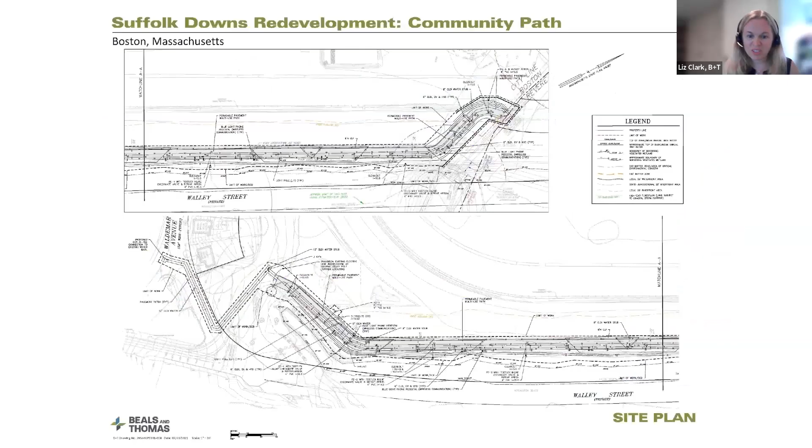Commissioner Kunian had asked about resiliency and sea level rise. I did reference our significant undertaking that we went through with our MEPA filing and the studies that had been performed. Actually, if we could flip to our slides, I'm gonna have you skip. Keep going, you're going to the back. So VHB had commissioned an extensive resiliency study on the site. This exhibit up here is showing the 4.2 foot sea level rise scenario with a 100-year rainfall event. And we have a variety of scenarios going here.

We have our no build condition and our full build condition up at the top, as well as the phased analysis. And you can see that through the mitigation measures that we're doing under our full build, we are reducing the level of flooding. The measures include adding tide gates, upgrading the regional stormwater pump station, as well as raising our roads and providing some flood storage throughout the site.

So we provided the 1.5 feet of sea level rise exhibit, which equates to the 2035 business as usual scenario, not changing anything, and the 4.2 feet of sea level rise, which equates to the 2070 business as usual sea level rise. So the worst case sea level rise scenarios. We did acknowledge that during 2070, in the event we get the 4.2 feet of sea level rise, the 100-year storm event, and then a 100-year tide, we will see flooding on the path for about 2 to 4 hours. But this is consistent with our resiliency strategy, which utilizes the open spaces for flooding.

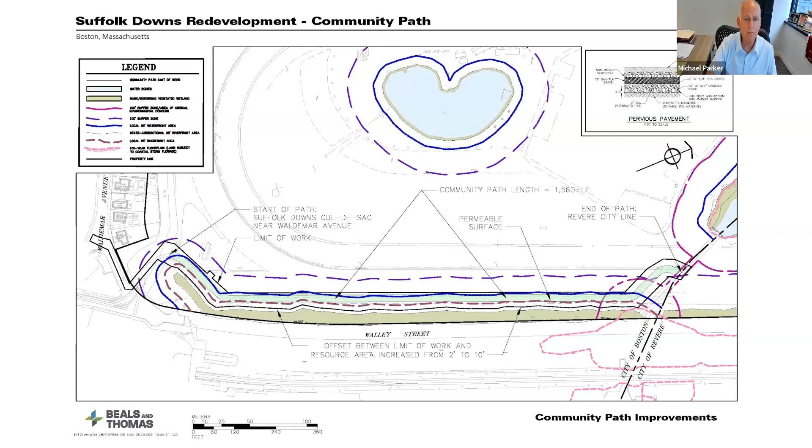Elena, did you have anything? I didn't have anything on this. Okay, thank you. Commissioner Sullivan?

Liz, I thought I had asked if you were putting in a permanent water line down this path at this time. Yes, we are. You did. Yes. Oh, and so I asked it and you answered me and I forgot. Okay. And I think then you had a question. Yeah, my question was a lot better than Nick Long's. So I'm just letting you know.

And I had referenced that we will be discussing that in a separate forum when we file our site plan review application with you. And you had further asked if the water line would be active or not. Yeah. Which is something we should also discuss and come to a resolution. And I'm open to your feedback on that. Okay, that's all I had.

Okay, perfect. Yeah, Liz, we're a very sensitive group. You should probably refrain from that. Great question, Commissioner Long. Oh, thanks for the tip. See what happens. You all had great comments. There you go. Much better. Commissioner Long. Yeah, Liz, thank you for answering my great question and my regular question.

Happy with that condition language. It looked like, yeah, initial invasive removal and then subsequent management. So that sounds wonderful. Great, thank you. Commissioner Wilson? Sorry, mute problems. All good on my front. Thank you. Commissioner Kunian? Thank you, Chair Parker.

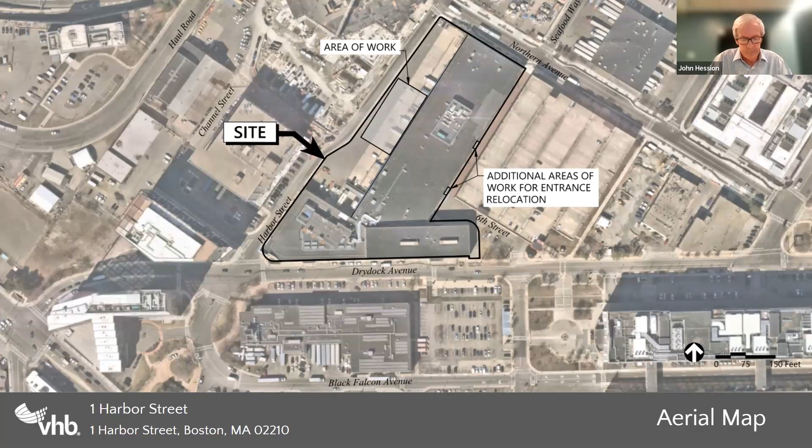And as the chair mentioned in the reading of the public notice, the entire property and the proposed area of work are both located within two resource areas. That's the reason we're here before the commission tonight. The first resource area is land subject to coastal storm flowage, as defined by the floodplain identified on the FEMA flood maps. It's a little bit obscured there, but the FEMA 100-year flood elevation at this location is elevation 10. Translating that to Boston City base, that's 16.46, and most of the other information presented tonight will be in Boston City base. Next slide, please.

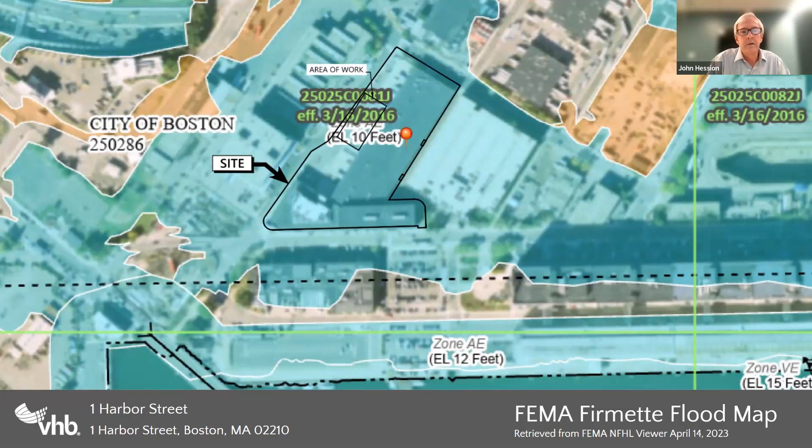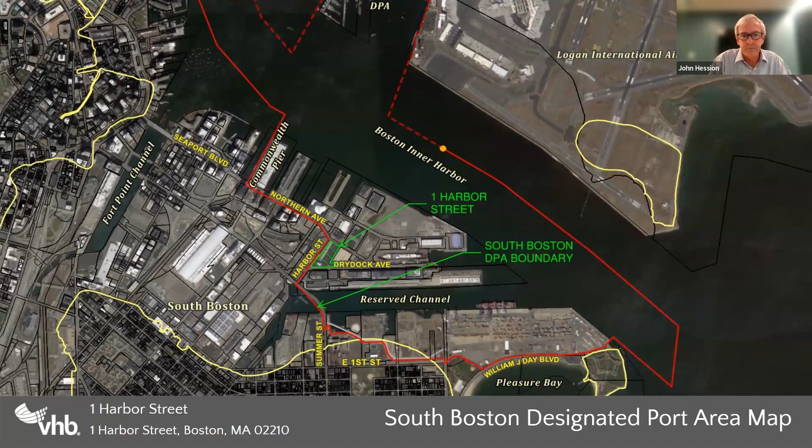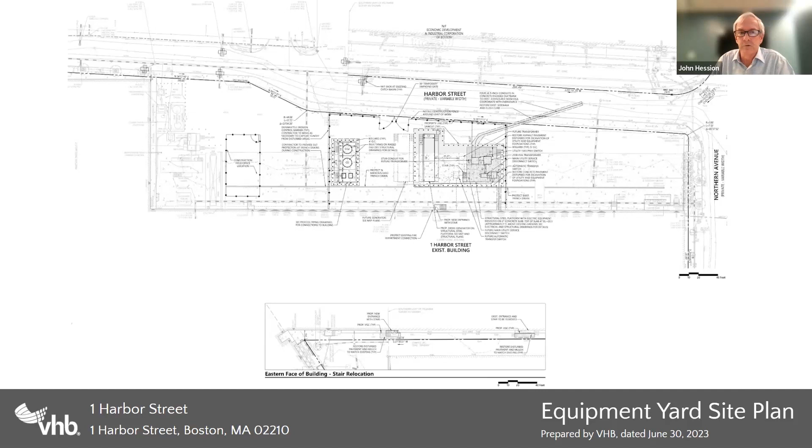And I won't spend too much time on this slide, but this is the actual site plan included in our notice of intent application materials. In just a second, we'll switch to the next slide. As I mentioned earlier, I believe a picture's worth 1,000 words. So we can refer back to the actual civil drawing, but this is a rendered version of what's on the civil drawing overlaid on an aerial photo. I think it's easier to read, provides more clarity, and really gives a sense of what's proposed and where it's proposed on the site. So I'll walk through working from right to left.

In the upper right, in the middle of Harbor Street, there's a label there, New Eversource Electrical Service. That's a big part of what's driving the work here in what we're calling a utility yard area. To operate the R&D and manufacturing operation that Mike described earlier, we need additional power at this 1 Harbor Street location. As Mike said, he mentioned Eversource as a partner in this. We've been working with Eversource to identify how to bring additional electric service into this building to serve this future use. We would connect to a manhole in Harbor Street, run a line into the site to a new switch, new transformer, and additional electric transfer switches and such to provide the service to the building. That will all be installed on an elevated structural steel platform, and I'll get into more detail on that in just a second.

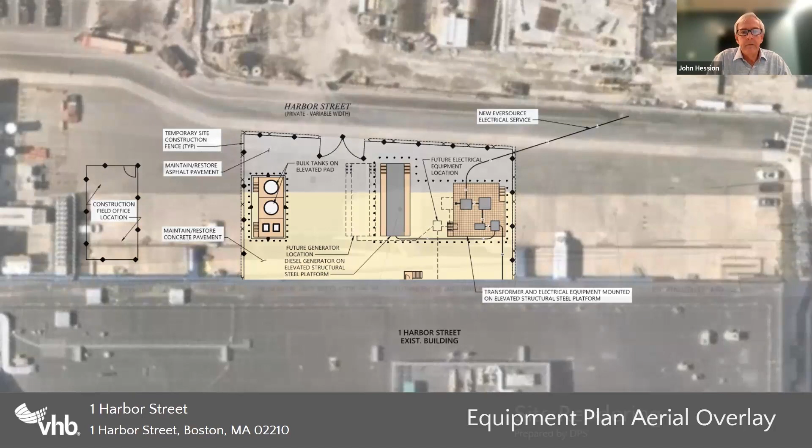As Mike pointed out, this is the initial phase to get this interior fit out of this 30,000 square foot manufacturing and R&D facility. Vertex has plans to do additional work on this building, resiliency improvements and future improvements to the building. And I'm sure we'll be back in front of this commission in the future. And there are also potential plans, Vertex working with their landlord, to make improvements to Harbor Street.

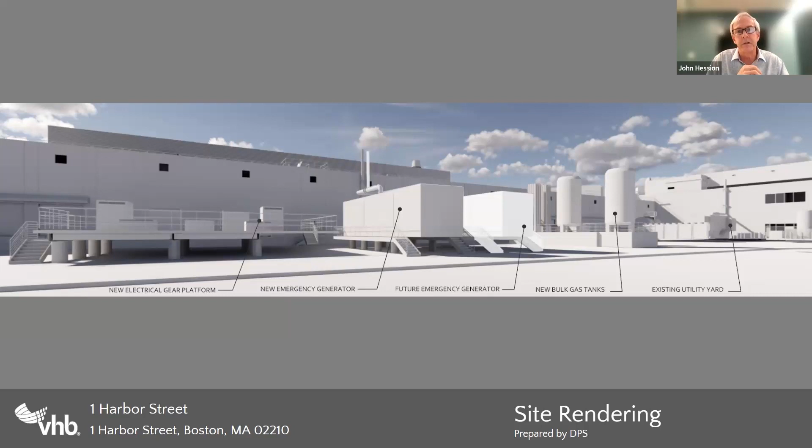But some of the future improvements that Vertex is master planning now will be aware of what is happening with resiliency in the marine park, and will be in accordance with and in support of those future goals. So there are other uses that could actually require the 2 feet of freeboard. It doesn't specify in the plan here. Maybe we'll get clarity on that later in the hearing, but okay, good. That's all I had. Thank you.

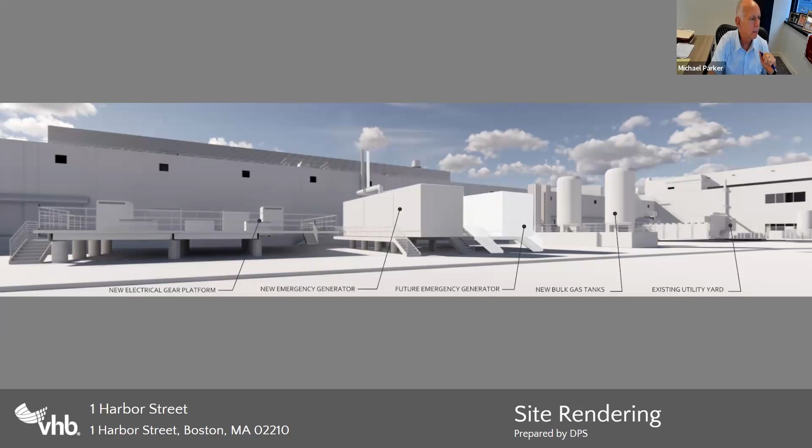Eleanor, what do you have? I don't have anything in particular, and I know that you already noted that the conditions looked good to you, so that was my only note. Fantastic. Thank you. Commissioner Sullivan?

Yeah, what's in those bulk gas storage tanks? What kind of gas is that? Carbon dioxide and oxygen. Oh, okay. And the question was mentioned on stormwater. How does that drain now? I know what the area looks like. And are you putting in infiltration or anything to take care of pollutants?

So the site and portions of Harbor Street today all drain towards the building to a couple of trench drains that run parallel to the west face, the Harbor Street face of the One Harbor building. In, I believe it was 2005, the previous long-term leaseholder of this property did some improvements through the Boston Water and Sewer Commission, and installed 2 particle separators between the trench drains and where they connect into the storm drain system in Harbor Street.

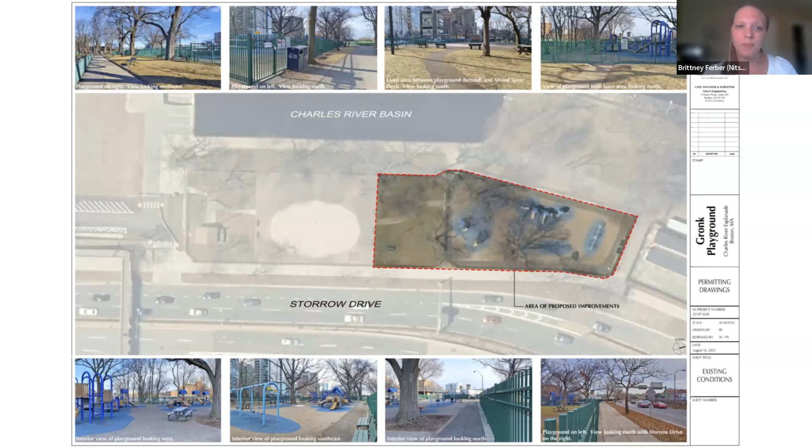And then in the next photo to the right, you can see an existing tree. There are 2 large trees within the existing playground, and those will be maintained throughout construction. I'll talk a little bit more about that later. So that existing green fence goes around both the spray deck and the playground in that existing condition, as well as in between the two. So the fence separates the spray deck from the park, although there is a pathway still to get from one to the other. It's just gated. Can you go to the next slide, please?

So this graphic shows kind of that proposed condition and our resource areas. So starting and working our way out, you can see the 25-foot riverfront area. We are just on the edge of that, but we are not proposing any work within the riverfront area. And then we have the 25-foot waterfront area. You can start to see we have more work within that zone, and then we have the 100-foot buffer further to the right. In the proposed condition, that fence that we looked at is going to remain around the spray deck and the playground, but the part that separates the 2 areas will be removed.

And then we will be constructing a new ADA accessible path from the playground to the spray deck. And then if you look in that Alfond spray deck area, that's where you see the lawn. There's a path, like I just said, and then we have some picnic tables that will be on concrete pads. And then in addition to that, we're proposing 5 new shade trees in that area. And the trees will be 2 different types of species, both of which are native to Suffolk County, according to the Vascular Plants of Massachusetts publication.

And then for the playground, the existing play equipment, the existing benches, all of the existing site features will be removed, and the existing play surface will be removed as well. We will maintain those 2 existing large diameter trees, and that one that you see on the 25-foot waterfront is about 39 inches in diameter, and the one just outside of the 100-foot buffer is 47 inches. So those will be maintained, and I'll talk a little bit more about what we're doing to protect them a little later.

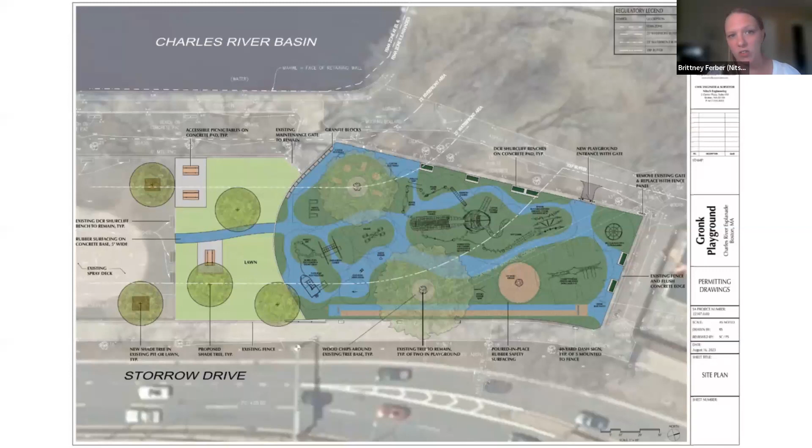The dark green and the blue and the brown colors that you're seeing are all poured in place rubber play surface, and we will be proposing crushed stone below it to provide fall attenuation and also help with our stormwater management. By removing that asphalt walkway that goes around the perimeter of the playground and introducing the rubber play surface, the porous surface instead, we will be reducing the amount of impervious cover on the site by about 2,200 square feet. Can you go to the next slide, please?

I want to talk a little bit about what we are proposing for erosion control and construction access. We do not have any existing drainage structures on site or proposed drainage inlets on site, so we are not going to have any inlet protection within our limit of work. We do show perimeter control around the exterior of the limit of work, so we'll be using that existing fence that you saw in the photos for construction access and keeping people out, and then just interior to that there will be the perimeter protection.

And then to the north of the site, just north of where you see that blue, you see an enclosed fenced area, and that is where stockpiling and staging will occur. So it will be outside of any resource areas or the 100-foot buffer, and it will also have the perimeter protection around it. Construction access will happen in 2 locations. So it will happen just where the spray deck and the playground meet on the west side, and then we'll also have access on the north side. The reason for having 2 points of access is to try to prevent construction vehicles from driving into and through the tree protection zones over and over. So I can talk a little bit more about what that tree protection zone is in a minute.

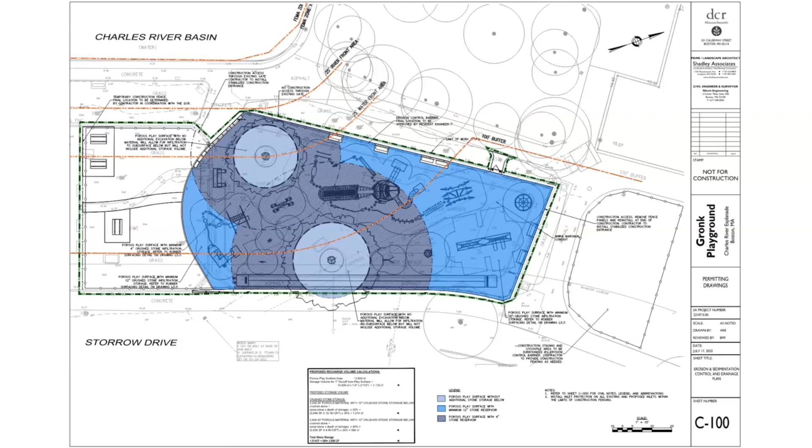I probably am going to vote for this unless Gronk signs with the Giants, and then I'm not voting for this. Sorry. He's retired. No, there was a story today that he's thinking about going back to play for the Giants. Oh, no. Uh-oh. That would be very... Okay, I think he crossed that line with the Bucs, but anyway.

Okay, so Elena, I don't see any hands raised. No hands raised. And I'm also not seeing anything in the inbox. Okay, great. I'm looking through the file here, it looks like the order of conditions is okay to the applicant. I think we can vote on both of them. There was the 1 point that I reached back out about. Just wanted to confirm that that was okay with snow management. Yes, DCR will submit their general snow management plan to the commission, with the caveat that there is no snow removal planned for the playground itself. Great, thanks.

Okay, so with that, I would make a motion to close the hearing and issue the order of conditions. So moved. Second. Thank you. Commissioner Sullivan, aye. Commissioner Long, aye. Commissioner Wilson, aye. Commissioner Conan, aye. Commissioner Richmond. As long as he stays retired. Okay. I vote aye, 6-0. Thank you.

Thank you very much. Thank you, everybody. Appreciate it.

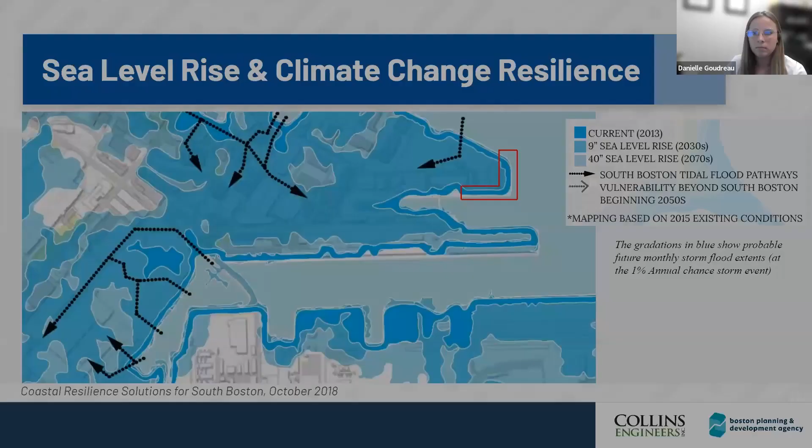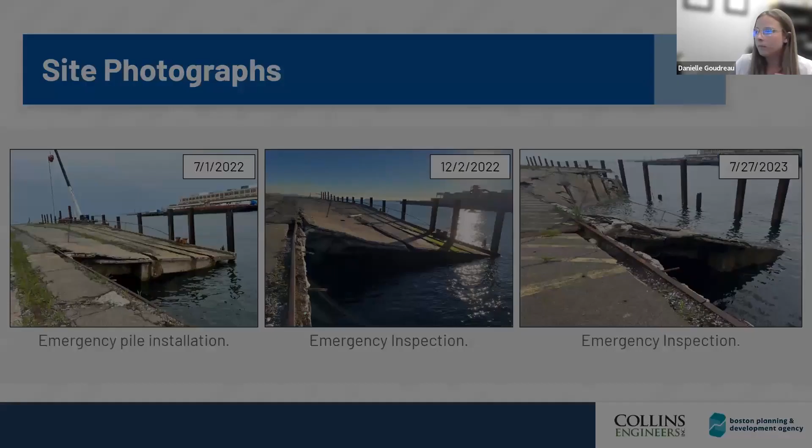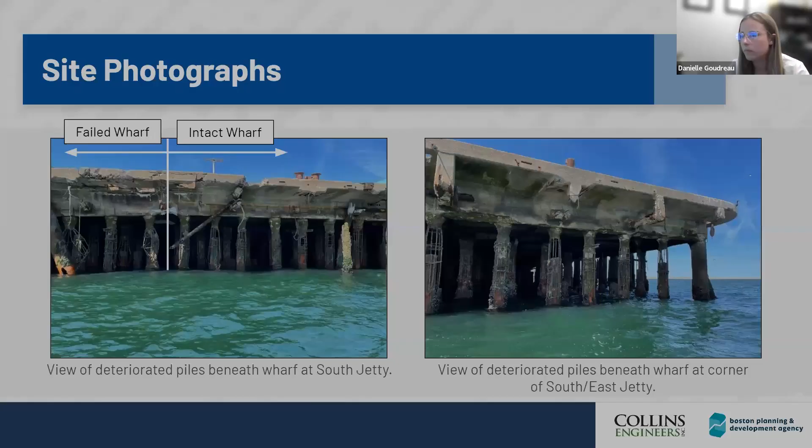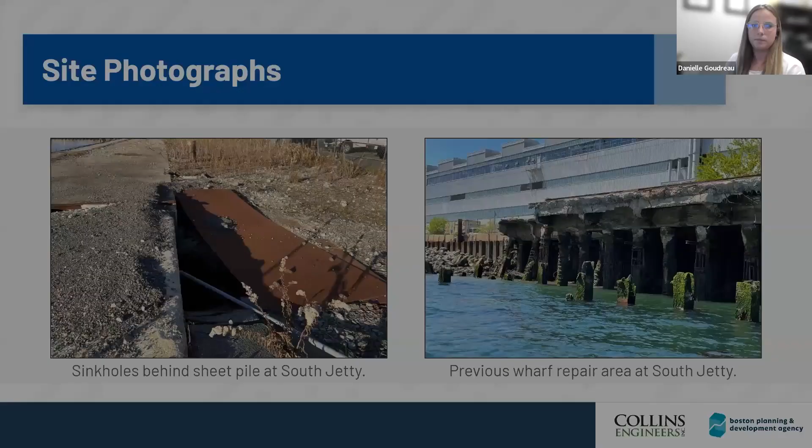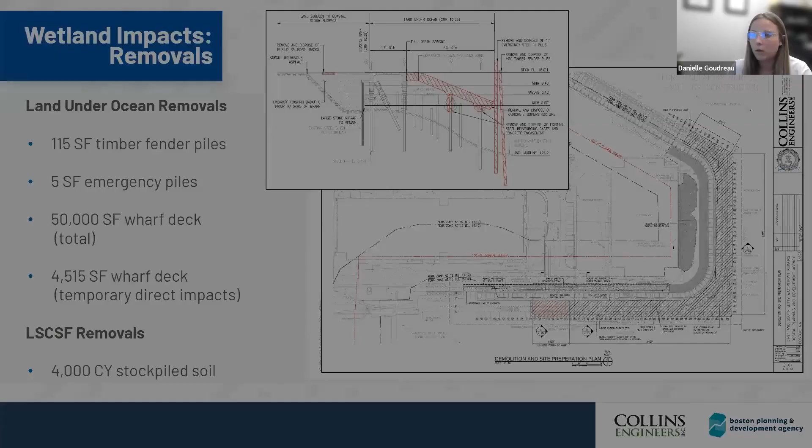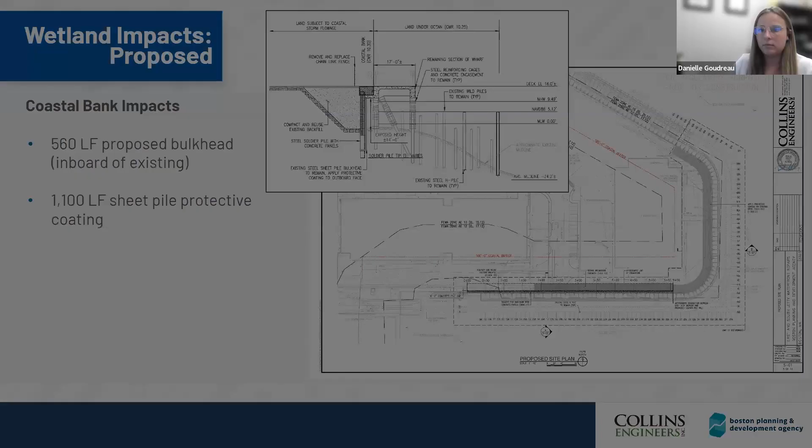The only other thing that I do want to point out is I'm aware that there's no DEP file number. I did contact DEP to see if we were able to get it ahead of this meeting, but didn't have any luck. That being said, we accept all of the draft conditions, and as we go through comments, if there's no concerns, I'm not sure if it's a possibility to maybe provisionally close the hearing without a file number, just given the circumstances and threat to public safety, but I do want to open the floor for questions at this point. Sure. Okay, thank you.

That was very comprehensive. Appreciate it. As far as your question about conditionally closing or provisionally closing the hearing, even if we close the hearing, it still doesn't get you where you need to be. We have to issue the order of conditions, unfortunately. So I'm not sure of the way around this. I've been thinking about it, and I'll think about it some more as other commissioners ask questions. But a few questions I have.